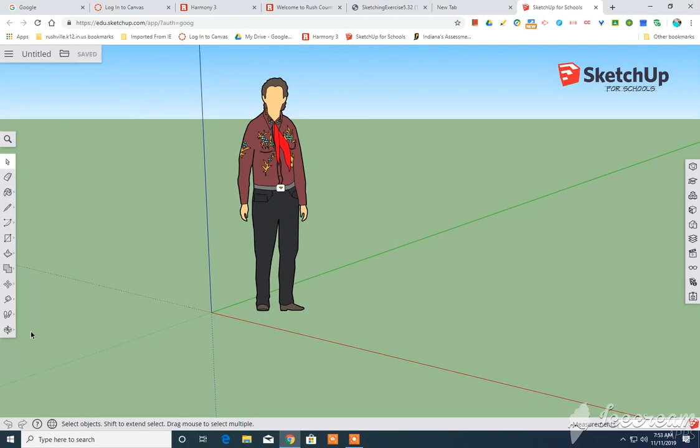Want to create a new file. Let's go with feet and inches, simple template. Okay, so here we are. Toolbar is a little different here. We still have the origin point. Let's see, there is your rectangle tool.

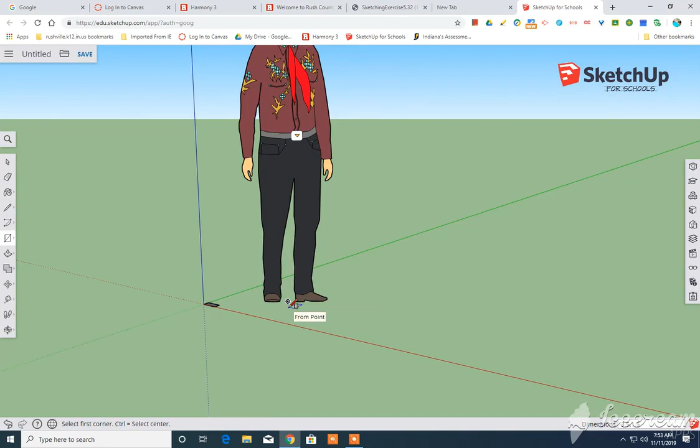We need to get set up with how long this object is. I see that it's 1, 2, 3, 4, 5, 6, 7 halves, which would be 3.5 by 1.5 inches. 1, 2, 3 halves. So I'm going to go ahead and type in that data there, create a rectangle. Said it was 3.5 inches, comma 1.5. Okay, I'm going to take my select tool, I'm going to delete. Zoom tool is right up here if you're using your mouse pad, but I'm using a mouse here, so I'm zooming in on this.

Push pull is right here. We need to see how thick the base pad is. So the base pad is 2/4 or 1/2 inch. So push pull 0.50.

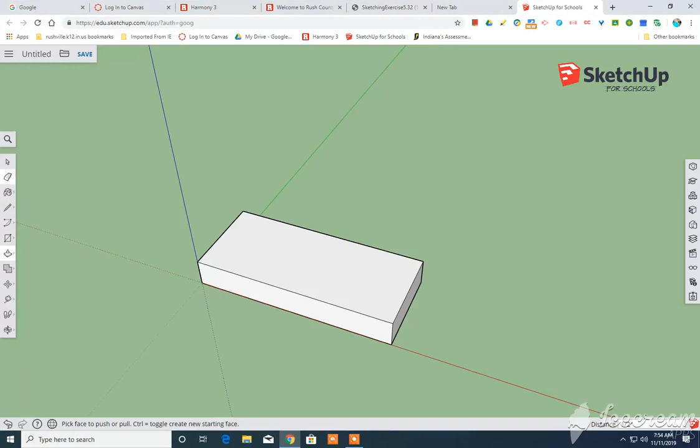Now we want to go ahead and get this portion of it, this upright tower kind of thing, and I see the total width of it is 1, 2, 3 halves by 1/2 inch wide. Oops. So I'm going to create another rectangle starting here in the back left corner. It's 1.5 inches long, comma 1/2 inch. Whoops. Let's undo that. Your undo button's right there. Let's try that again. Rectangle tool. 1.5 inches, comma 0.5. Alright, there we go.

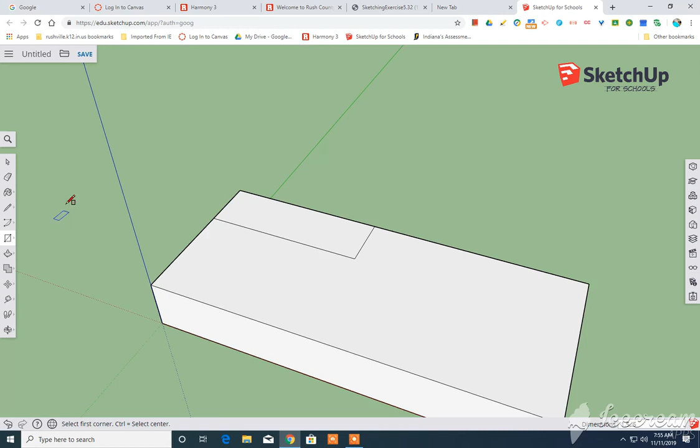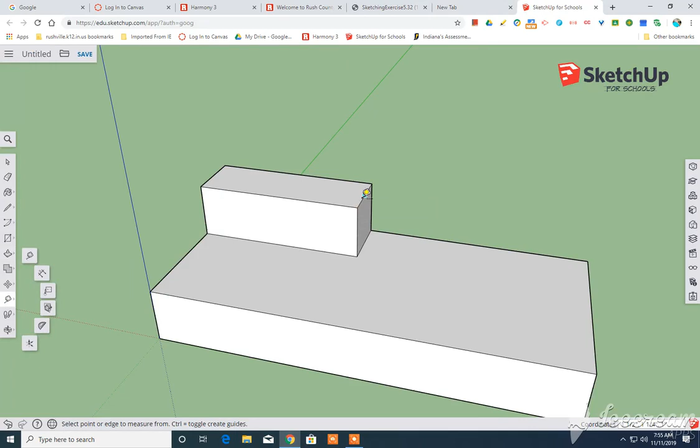Now looking back on the thing here, I see this little flat spot here is 1/2 inch tall. So I'm going to go back to push pull, which is right here, and push pull this up 0.5 inches. And now if we look back on this here, we've got a 1/2 inch little flat spot here on top, so I'm going to create a guideline. So guideline tool, tape measure, 0.5 inches over, and I'm going to divide the face with a straight line.

Now checking back on here, I see the total height of this here is 3/4. So flipping back, I'm going to push pull this up 3/4 of an inch. And then we got this part that comes over the top. It's a 1/2 inch thick. So, whoops, we're going to go ahead and get that squared away. Tape measure, 1/2 inch thick. And then I'm going to divide the face here.

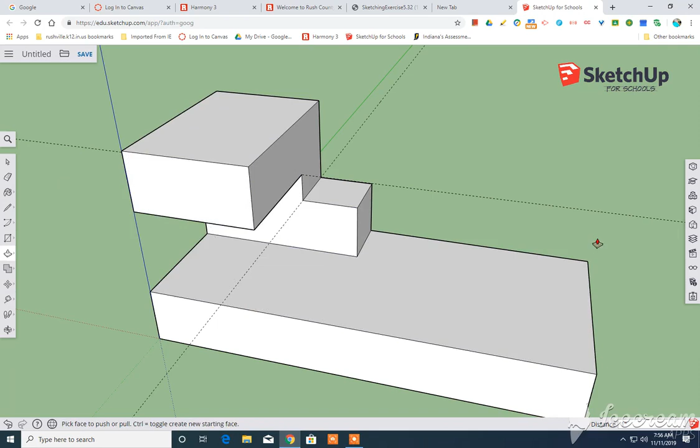And I'm going to push pull this out using my inference right here. I want this to be the same size as this edge right here. Alright, so that looks pretty good there. I think I'm going to stop there and do the second part with the holes. Be back in a minute.

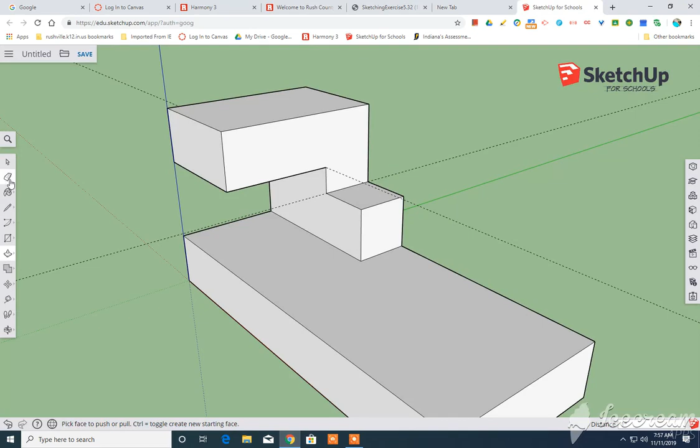Okay, back for the second part here, the last part, which is just to take care of the holes in this. There's 3 holes. If we take a look here on the sketching exercise, we can see they're right there. 1 in the top part and then 2 in the base part. So what I'm going to do here is I'm going to flip back. I want to get rid of these. There's your erase tool. I'm going to get rid of these guidelines that I've created.

I'm going to take the top hole first. So looking at the top there, the hole center is a 1/2 inch back from the front, and it's also centered from left to right. So that's a pretty straightforward arrangement. So we're going to go ahead and take the tape measure tool again, and we're going to measure over half the total distance using the midpoint snap, and then I'm going to go up 0.5 inches here from front to back.

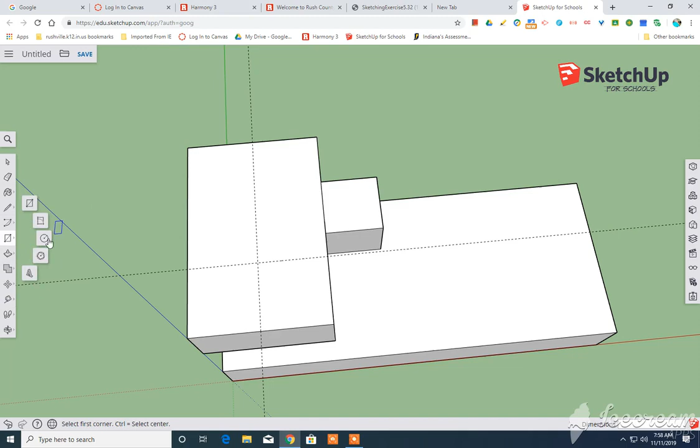Now where those X marks the spot there, I'm going to create a circle. Now your circle's underneath your rectangle, so I just choose that, and then I go ahead, it's a 1/2 inch diameter circle, so it's 0.25 radius. Alright, so there's that. I'm going to use push-pull here to go ahead and push-pull this downward.

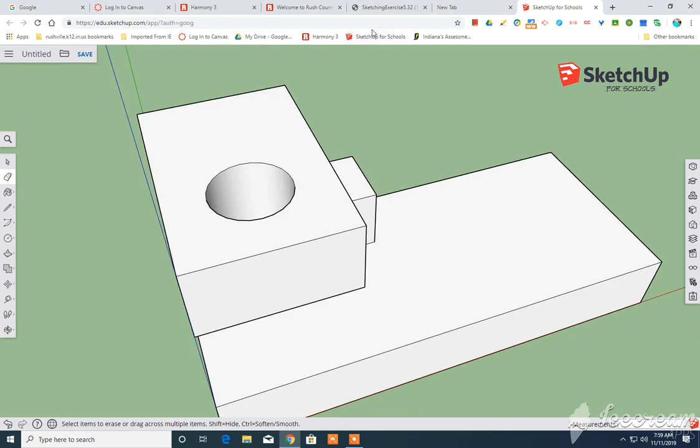There we go, push-pull. Alright, subtract that away. Let's get rid of these guidelines. We no longer need those. Let's focus in on the second set of holes there. Now the holes from front to back, you can see here by these, it's centered from front to back. These holes share a common center line.

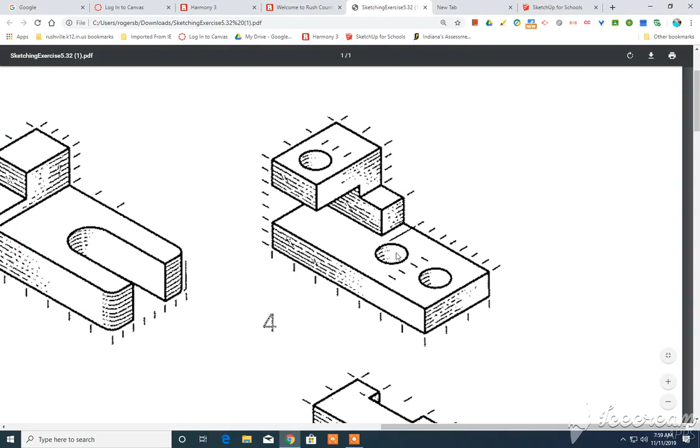And then this one here, the hole center is 1/2 inch back, and then from this edge right here to the right, it's 1/2 inch back. So what I'm going to do is take my tape measure tool, create some guidelines here, midpoint snap, 1/2 inch from this side, and then I'm going to rotate this around a little bit, and from this point here, which is the reference point, I want to go this way 0.5 inches.

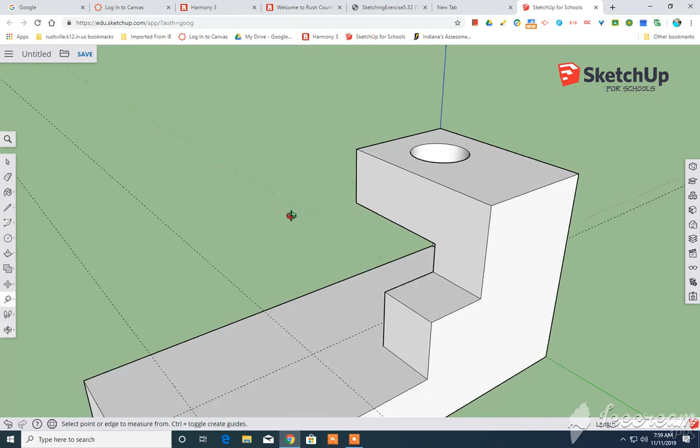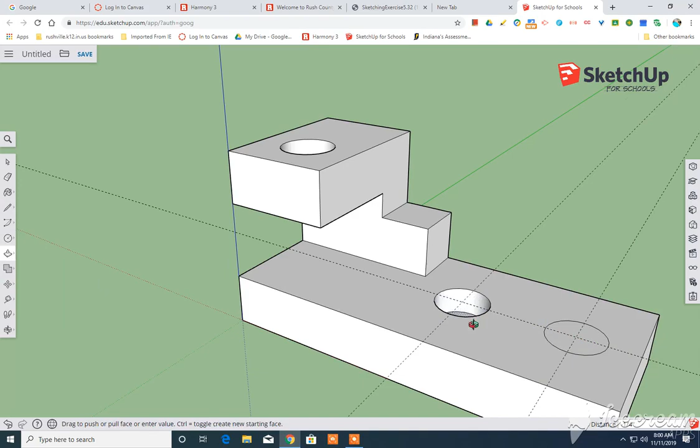Alright, now all I have to do is create a couple of holes there, a couple radius holes, 1/4 inch radius. I'm recording. And then all I have to do is just subtract them. Okay.

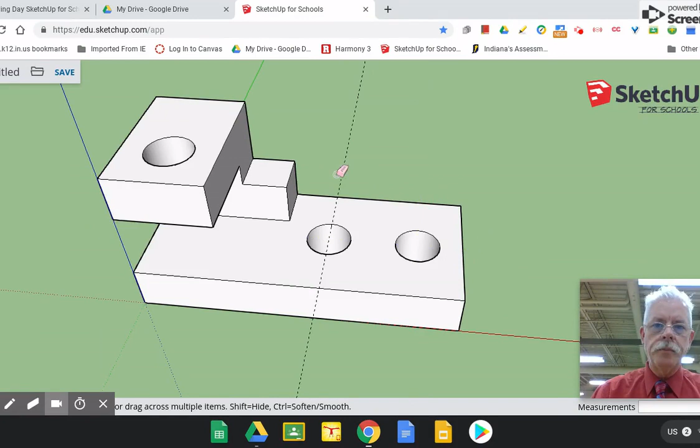Okay, well, here we go. Last bit of this here. What I'd like for us to do is clean up the model, getting ready for saving. So I'm going to just erase these lines here. And before we actually save, there's some things we have to prepare. We have to go to our Google Drive. So go ahead and open up another tab on your browser there.

Make sure you go under here, the waffle, and go to Drive, and that way you'll get to your Google Drive. What I did is I created a SketchUp folder in here, and that's really easy. Just go under New, and the first option is Folder. Create that, name the folder SketchUp. I've already created one, so I'm just going to cancel that, but you'd name it SketchUp right here, and go ahead and create in your case.

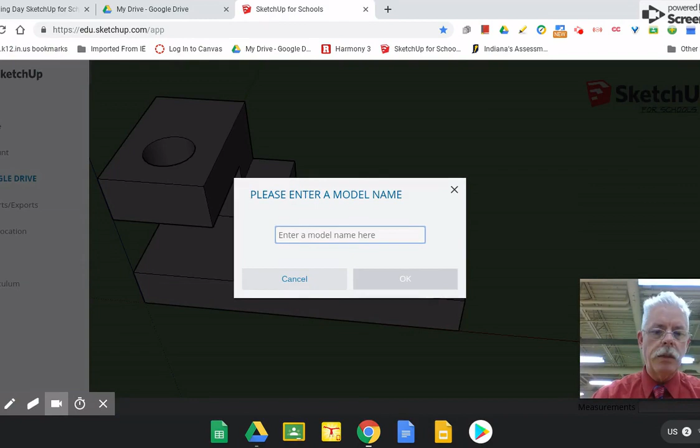And so once we have that SketchUp folder, now we have a spot for this to be saved. So now we can go back to SketchUp for Schools and do the save option. It's up here in the upper left-hand corner. We'll just take save, and it wants a name. So we will say something like E-Learning 5.32-4. And I'm going to click OK. There we go.

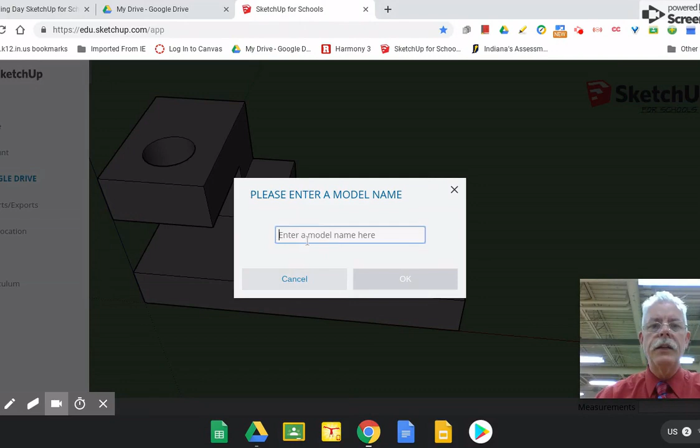All right, so it asks, what folder do you want to save it to? We're going to save it to our SketchUp folder that we created earlier, and then I just click Select. All right, so let's try a different name. E-Learning 5.32-4. Let's call it W. Click OK. Once again, it's going to ask us about what folder. Click Select.

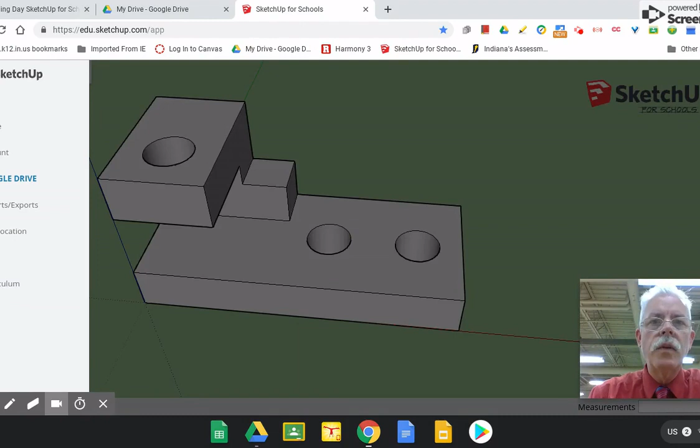So it's saving the file. See, it's saving right up here. It says save. Oh, okay. So that's saving it. Now we want to go ahead and export this out. The way we do that is we go up to the file folder here in the upper left-hand corner, go to the file, and then we want to export.

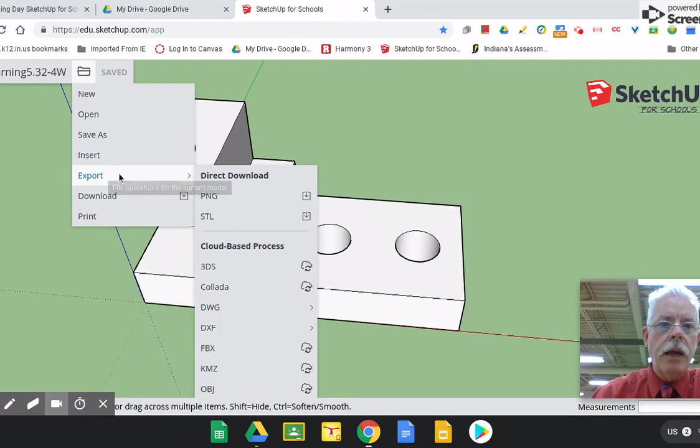And the option we want is a PNG. So I'm going to click that. So there's my PNG. That's the preview, and that looks fine. But underneath my picture there's a button that says Export PNG. So I'm just going to click on that to go ahead and export that out.

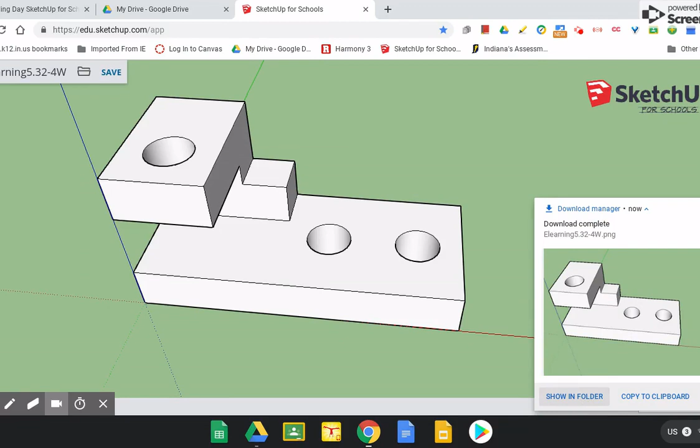All right, now here's an important thing. We want to show this in folder, okay? This file is going to your download folder, but we want it to be in the top level of your Google Drive. So there's my e-learning file, and I want to drag it into my files right here, or Google Drive, I think would be a better one. All right, so there we go. And we can close that out.

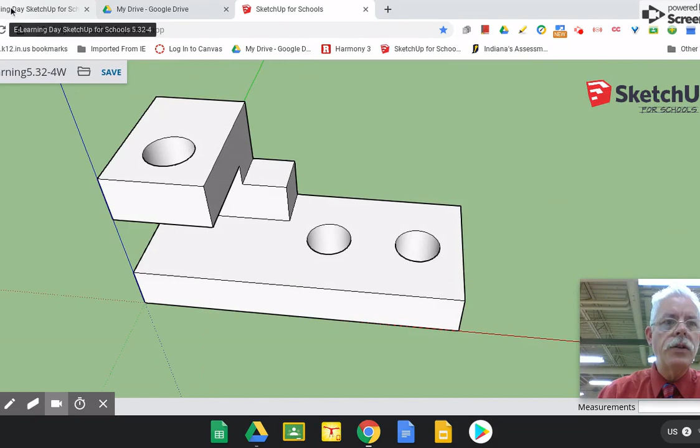Now I'm going to go to my Canvas assignment page, which hopefully everyone knows how to do. I'm going to submit the assignment. When I get to the assignment submission window, I want to choose the file upload, choose file. So what I'm looking for, I'm going through here and I'm seeing all these SKP files, and I don't want those. Well, let's go to my drive.